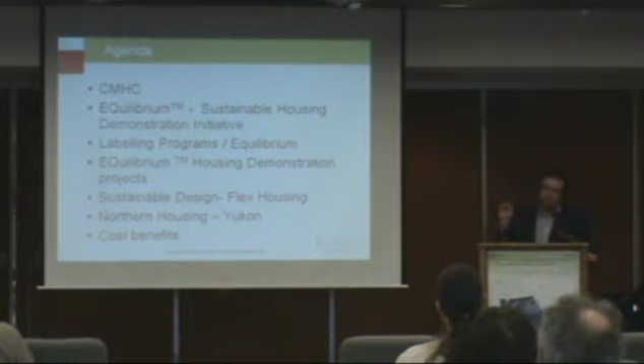One of the things, if I have time, is to also talk about flex housing, how it's incorporated within the design work. It's not so much to do with energy efficiency, but also affordability, adaptability, and accessibility, one of the most important ones. And if I have time, also to look at what they're doing in the north, because if they're doing something there, what can be applied down in the southern part of the country? We can get just as cold down here as it is up in the Yukon.

And just a little bit on the cost benefits. So I talked a little about the housing finance side earlier, mortgage loan insurance and some of the different products. CMHC also has an international division, which helps Canadian manufacturers export their product worldwide, and it's really been working very good. CMHC is also a world leader when it comes to the finance side and mortgage loan insurance.

So we also have our folks go to different countries to teach them how Canada gets our stuff done, how we house Canadians. And the information transfer, I quickly mentioned about that. We also have community development, so we have a representative in every province, because being a Federal Crown Corporation, we have to ensure we provide services and representation from CMHC at all levels of government.

So we have community development folks, we have Jackie Bevel, unfortunately she wasn't able to be here today. She's out of Regina, she looks after Saskatchewan for us. Then the other side is Aboriginal housing, where federal dollars are channeled through CMHC for building homes on First Nations. Of course it's not representative of all the housing, they do finance themselves, and there are other tools for financing housing on First Nations. However, through Section 95 of the National Housing Act, the dollars flow in through CMHC, and we help administer that.

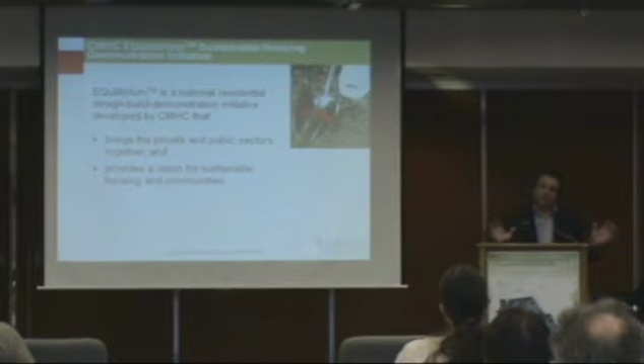Okay, so we'll get on with Equilibrium, the Sustainable Housing Demonstration Initiative. Where we're really at with this, it's a national residential design-build demonstration initiative developed by CMHC. It brings the private and public sectors together and provides a vision for sustainable housing and communities. I'll talk about the housing aspect this morning, and this afternoon I'll be on for about 15 minutes to focus on the next stage, equilibrium communities, and how the two integrate and how important that is.

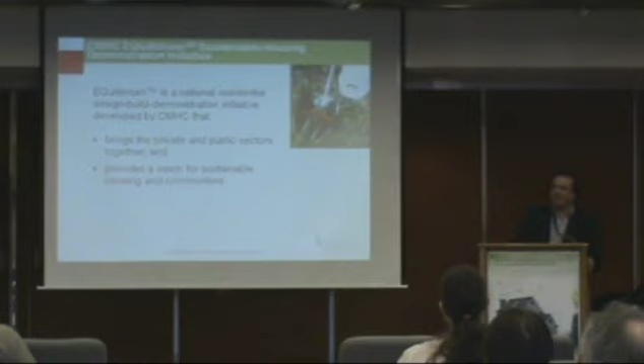And of course we'll have Philip Wong. I got him in from Toronto, and he's got a fantastic project to talk about later, one of the equilibrium projects too. Following me, we'll also have Trevor Gamlin, also from Avalon, who has one of the projects. I'll just touch on it a little bit too.

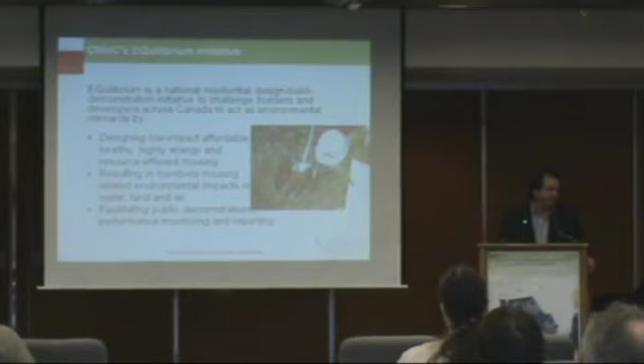So the idea here is designing low impact, affordable, healthy, highly energy and resource efficient housing, resulting in low to no housing related environmental impacts on water, land and air.

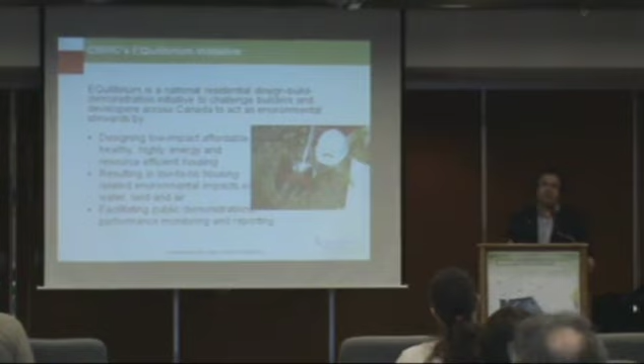Also facilitating public demonstrations, performance monitoring, and reporting. Once these units are complete, part of the agreement we have with each team is to allow us at least a 6-month window so we can do public and industry tours. People can come in and visit the homes and learn, see, feel, touch, smell, hopefully not kick, and they can see and learn. Even after they're sold and occupied, we can actually do some performance monitoring of these units and share that data and information with everyone.

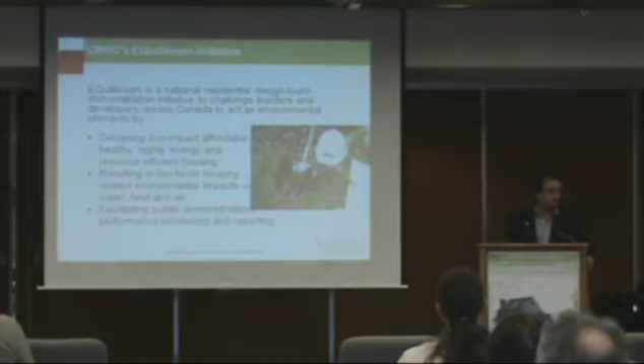There are 5 core principles we really looked at on this: occupant health and comfort, energy efficiency, which is one of the biggest targets, but also resource conservation, reducing the environmental impact it would take in construction and design of these units, and also affordability.

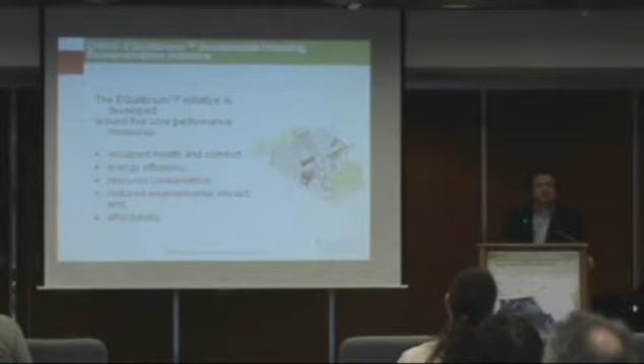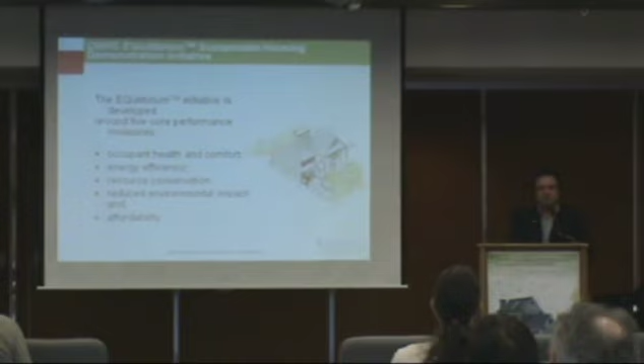Affordability is a real challenge because especially when making prototypes, it costs a bit more money to put these together. I know the challenge is to say, let's try to build market housing, but when you're putting pencil to paper to come up with designs, the first ones are definitely going to cost more money. But you'll learn from these, so you can sharpen your pencil as time goes on and actually reduce the cost. It'll become a lot more affordable for homeowners at that point.

As far as reporting is concerned, you can go online. At the very bottom here is CMHC's website, www.cmhc.ca. It's very easy - you choose français ou anglais first, then in the very center section it says sustainability or building and design. One of the two will bring you into Equilibrium, both housing and communities, and you can see the profiles of each of these projects.

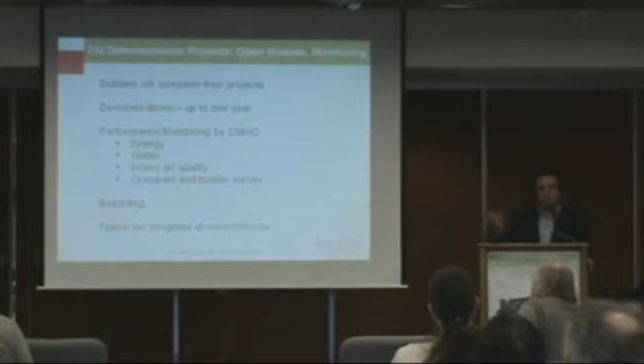You can look at the standard profiles, and then they can bring you down to some of the components. We also set up a little table over at the demonstration area with some of the profiles and features. Because we have Trevor out here, I wanted to ensure we had almost everything in print of some of the different features the Avalon Discovery 3 project has at this point in time, online.

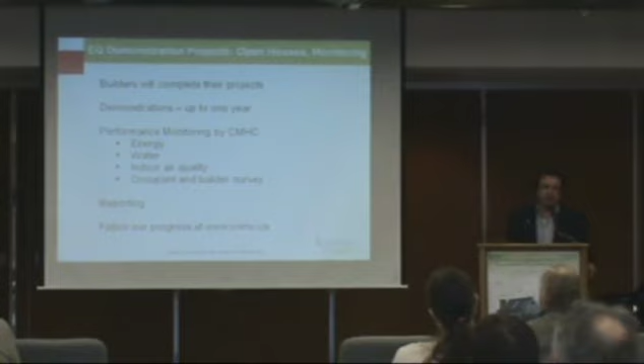So there could be more copies - I saved a few for tomorrow. In case it runs out, you can come see me and I'll get you some more. But regardless, this is all available online, you can download it and so on. I didn't want to kill too many trees - after all, this is sustainability, right?

So the research on highly insulated building envelopes looks at energy efficiency, also durability, because durability all falls part of affordability. If you're going to need to replace your house every 60, 70, or 80 years, is that really considered affordable? If you can build a house that lasts a lot longer, that basically goes to the bottom line toward affordability, stretching it over time.

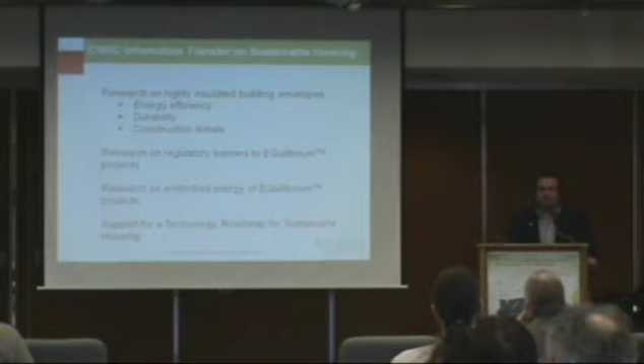And then, of course, looking at construction details. Different types of construction, whether it's double wall construction, structurally insulated panels, ICF, insulated concrete forms. There are many different types of concrete methods used. So we're able to dabble into a few different areas and learn the pros and cons of some of these different systems.

Local research also on embodied energy. What does it take to get the materials in? Where does it come in? Does it all come from a boat in a container to come all the way across? Is the material made in North America, shipped to China, manufactured into components, then shipped back over here, put into trucks to make it all the way down to Moose Jaw? Now we talk about embodied energy - how much does that actually cost by the time you finally get it here to the door?

And looking at some possibilities of using local materials, local manufacturing, local products, and looking at the cost benefits. Also, what does it do to the economy? It helps stimulate, and it creates more jobs. And also basically supports a technology roadmap for sustainable housing.

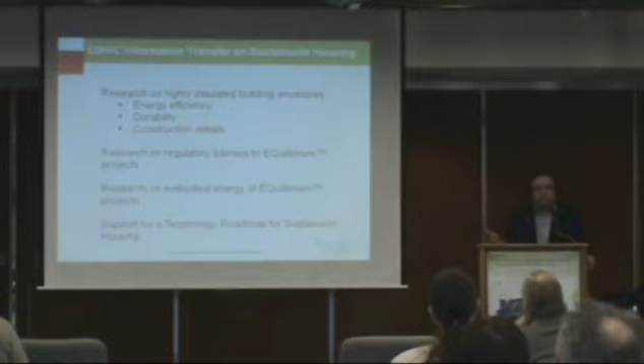So where is it going to go from here? Today, when we're looking at equilibrium housing, we want to get this started, but the thing is it all integrates into communities. And the thing is, if you can look at designing communities now, that'll actually - they could actually set, say, the parameter, or raise the bar.

To say, look, we want all the houses built in this community to be rated at no less than - I'll just take a figure - say no less than 85, the EnerGuide for Houses rating, for example. Then you've raised the bar higher than even, for example, the R2000 specification.

And the entire community can also save a lot of money on the fact that they don't necessarily have to put in so much infrastructure. If you look at how much it costs to put a stormwater management system in, when you can use bioswales, detentions, and retention ponds, and different landscape design to help reduce the actual infrastructure costs - what does that do? I mean, we know that 2x4s cost money, but really a lot of money too is the land and the infrastructure that goes into place. So if you can help reduce that, it contributes towards affordability, but also keeping it to natural environment.

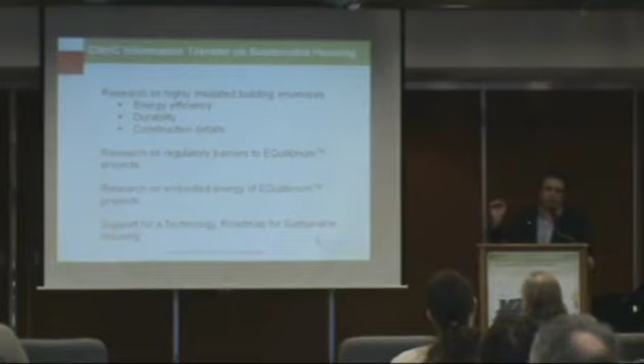And avoiding catastrophes. If you basically build in a lot of areas, say older areas where the old storm systems just can't keep up anymore because they've been added more towards drainage, where you get big downpours and the systems just won't handle it anymore, the cities might suffer flooded basements and so on. But if you kind of keep things natural, people will actually take advantage of capturing that water, using it within their own households, using it to water their lawns. It will substantially decrease the volumes being thrown down into the storm sewer systems.

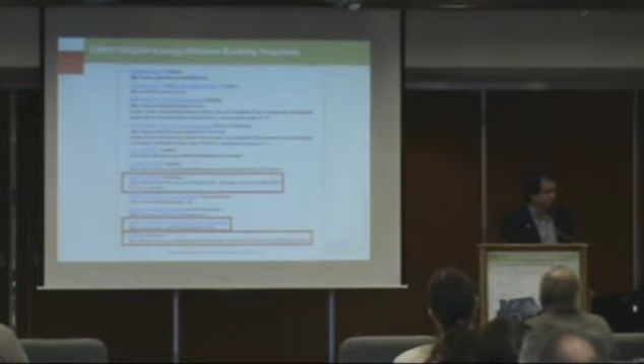Okay, I'll move over just a little bit to some of the different building programs that are out there. There's a lot of them. There's Built Green, which has been pushing its way over towards the west. We have, in the Yukon, a green home, the super green home - hopefully I can even talk about that. Power Smart in Manitoba, there's LEED. So there's many different rating and labeling systems. Or there's also R2000, I can't forget that, the one that we got listed on the very bottom there.

Equilibrium is not that, so I just want to clarify that. Equilibrium really is the name of this initiative and the name of this concept. So I, working for CMHC, could say, yeah, we can build an equilibrium home, but it's really not a certification. So if you build an equilibrium house, it's not like you're going to get an equilibrium sticker on the house or on the window.

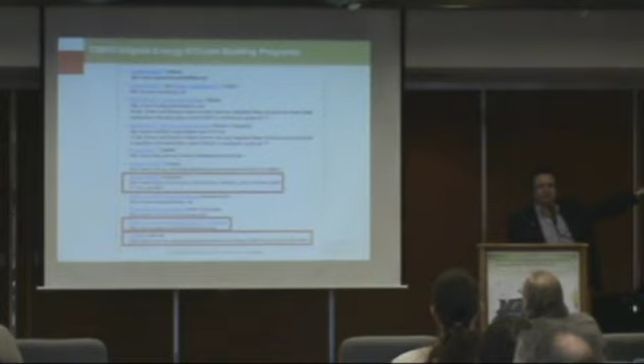It's, for instance, like Energy Star, another program that's more so in Ontario. When you buy appliances, there'll be an Energy Star sticker that'll determine or specify what type of power it'll consume and so on. Some of these other projects will recognize that. So that's about it for that one.

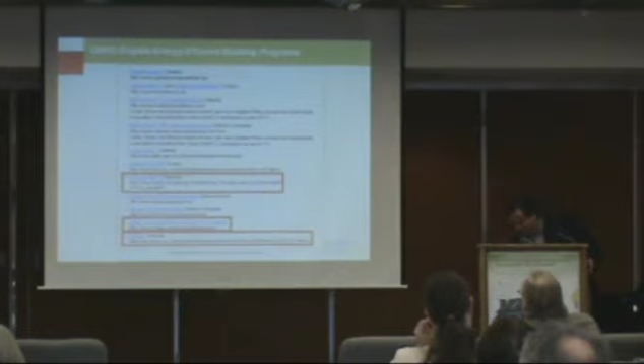So I'll get on to the actual equilibrium housing projects themselves. When we're looking at targeting the performance proposed by all the teams, we asked that they try to meet a net zero objective, close to that. So net zero, of course, producing as much energy as it consumes throughout the year.

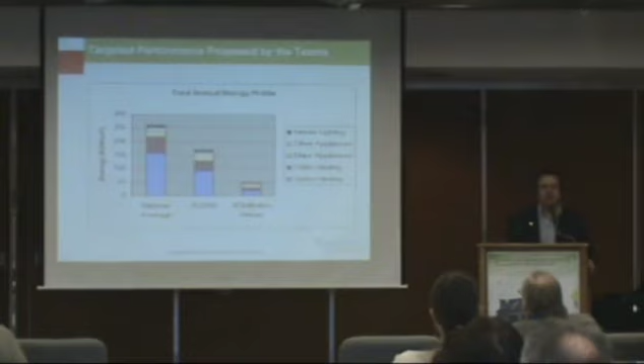So at certain times of the year, you're producing energy, say through photovoltaic panels, which is going into the grid, and other times you're consuming. Hopefully at the end of the year it shouldn't cost you anything. So that's one of the targets. There's a lot of work that goes into design and construction details to try to achieve those targets. It's not easy, but it's not impossible.

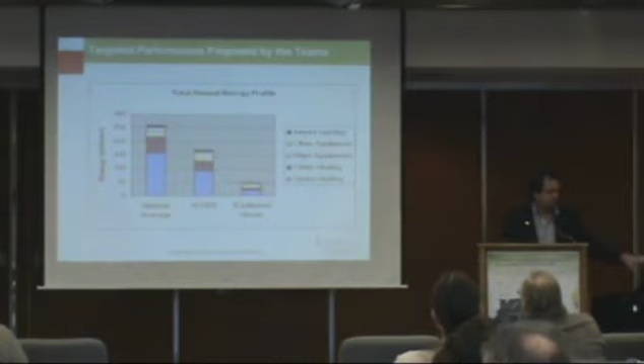For example, if you look at the national average on this chart, when you look at appliances, major appliances, water heating and space heating, you see on the blue the space heating it takes for the national average house. Now compare that to the R-2000 in the center column, and then the equilibrium house. You can tell right there, in kilowatt hours per square meter, how much energy an equilibrium house would actually use, which is actually very little.

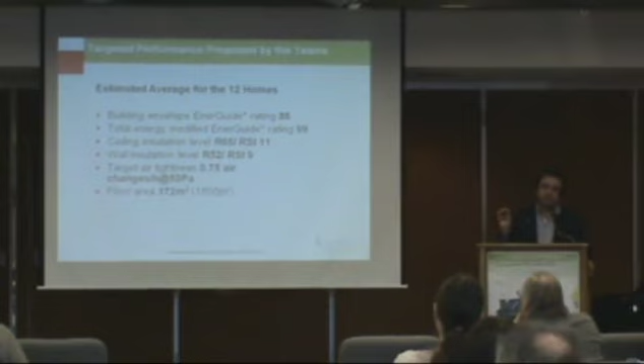So the estimated average for 12 homes: building envelope EnerGuide rating of roughly 86, total energy modified EnerGuide rating of 99. That's the energy side. You have to realize there's the actual building component, but also how much energy are you actually going to produce from the home. You add that to the actual building envelope rating, and you come up to figures like 99 on this one here.

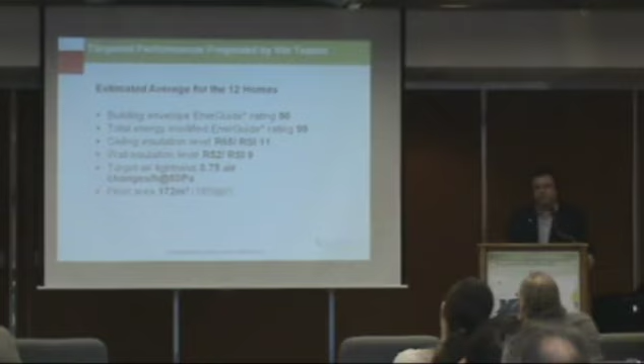And again, this is averaging for 12 homes. This data was actually collected a little while ago. When we set up the competition, we sent it out to everyone across the country, and we had over, I think, 75 or 77 applicants that came in. Out of those, we brought it all the way down to 12.

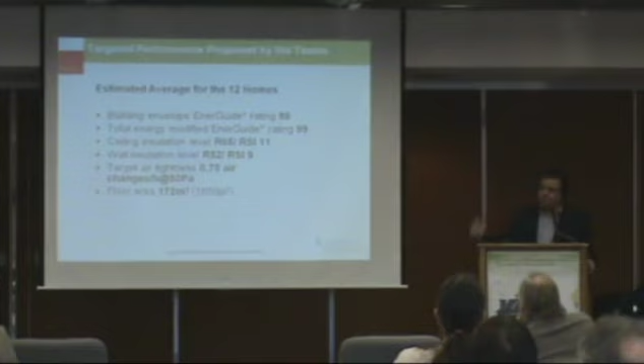That was great, but then after time came we realized, wait a minute, this is a demonstration project, and unfortunately British Columbia, the East Coast and the North really had none of them qualify. And it was pretty strict - when the door closed on that time, that was just the way it is. I think BC just slid their envelope under the door about one minute after 12 o'clock, but it had already closed.

So we realized, wait a minute, we really need to try to get some demonstration projects out there. So we opened it again, just for those areas. British Columbia got 2 and the East Coast got 1, and unfortunately the North didn't. However, we still have a good story to tell about the North, so it's not like they were omitted altogether. So now altogether we actually have 15 projects, but this data is based on the 12.

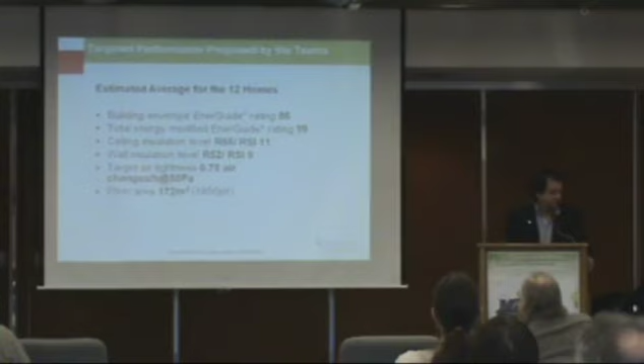So we're looking at ceiling insulation of R65, walls of R52, air tightness at least at 3/4 of an air change per hour, and also an average floor area of 172 square meters.

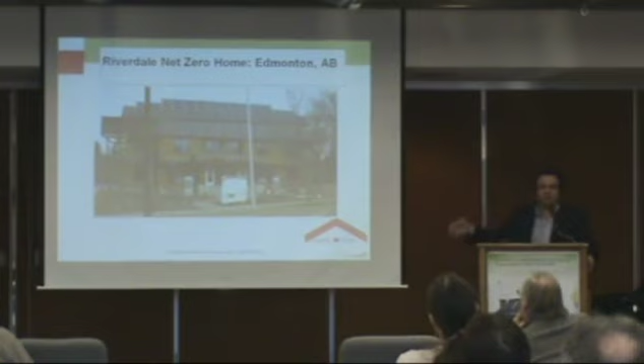One of the really cool challenges: if you look at the overhang for the doors, one has a little bit of a round to the front, and the other has a little peak to the front. Can anybody explain why? It's close - for them to get approval from the city to build a side-by-side in this Riverdale area, they wanted character. They wanted places that just don't look the same. So they were able to get their permit because of that.

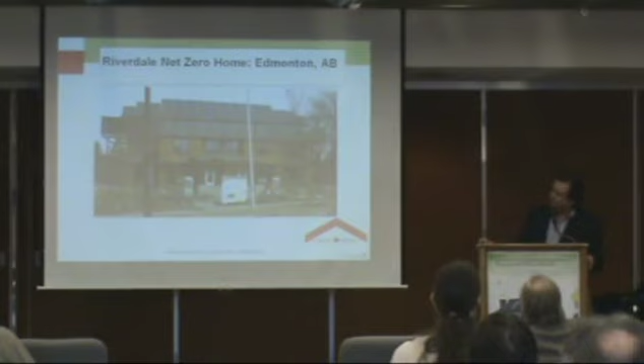So as you can tell here, what you see on the very top is an array of photovoltaics. Then you have hot water solar. And this is a project where they use double wall construction.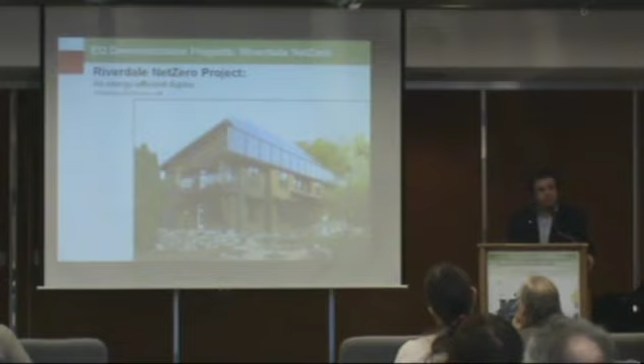Hot water - they have a 17,000 liter cistern in which they're storing the excess energy that the solar hot water panels are producing, because of course they don't need it all.

And I don't want to use the word overkill, but they know it. It was actually really cool to see them implement all of these different strategies and designs, but then they realized at the end, of course, they don't need all of this stuff.

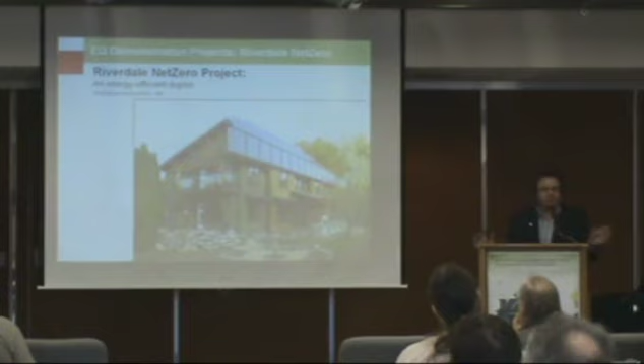I remember doing a tour in the middle of February, almost this time of year - I think it was 2 years ago, maybe 3 years ago. And anyway, the solar systems, the photovoltaics, none of that was still connected. It was installed, but they still had not connected it. All they had was a little 1,500 watt construction heater in the basement, and that was heating the house.

So you could pretty much almost heat this house with what they say is sort of equivalent to 4 toasters. That's how much energy you really only need.

So the question here, though, now that it's all built - and we say yeah, we're always learning as we go along - you ask yourself, is it worth spending thousands of dollars for all the stuff they put on the roof? How long would it take to recover your investment? Many, many years, and of course all the other gadgets that go along with it. So we learn as we go.

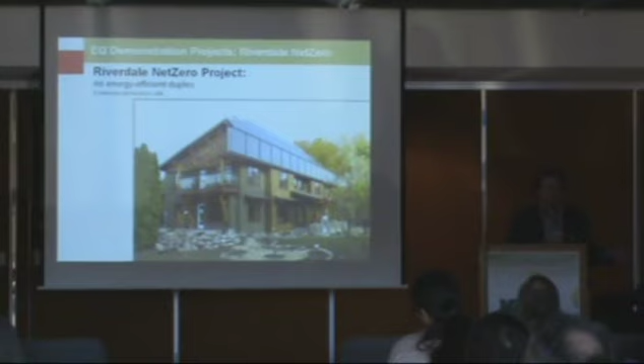But the really good story about this - they're also into their 4th generation of housing, where right now they're taking more advantage of passive solar energy, and I'll continue to say this: good building envelope, good airtight building envelope, is going to take care of a lot of your issues right now. And then it's going to be pretty difficult, when you can actually heat a house with very, very little energy, to justify why you need all these fancy systems.

Not to say that you can't - you can still get them net zero ready, rough them in, and then later on, depending upon how the cost of energy goes, you can add on easily.

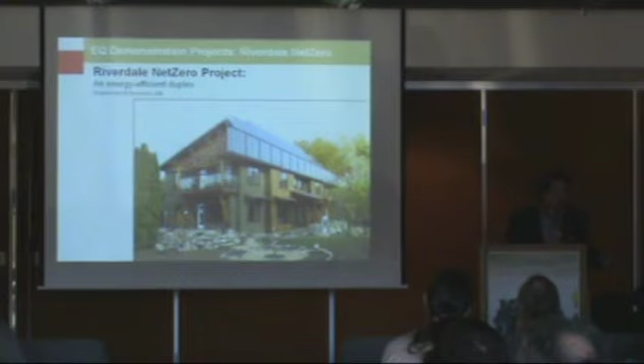Yeah, and this one here, you can also see - looking at accessibility, the way the walkways are going up, and the way they have the landscape design. They hardly have any grass at all. A lot of it is little gardens and different berries and types of vegetables that they're actually growing on site. And of course, they're using their own rainwater collection.

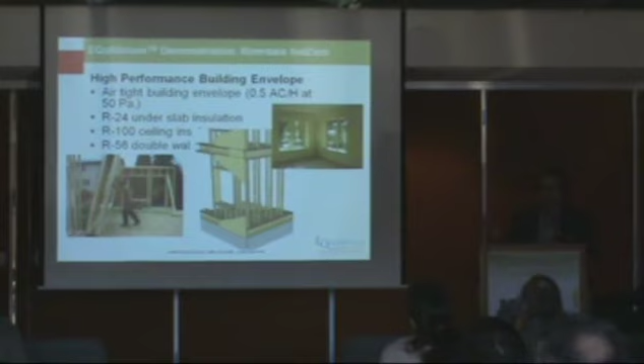Here's a double wall construction going up, and then of course you'll see - the one photo here at the very top, about the windows, about taking advantage of passive solar energy. On the inside, in the living room area, they actually had a concrete wall dividing the living room and dining area from the hallway in the back. So here again, now we have thermal storage in the wall.

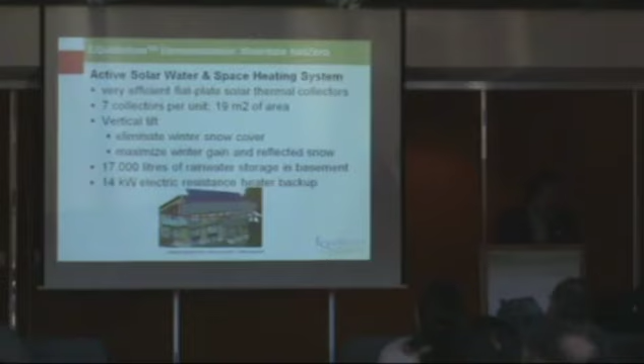To explain a little more, you have the active solar and water space heating system - very efficient flat plate solar thermal collectors, 7 collectors per unit. The vertical tilt eliminates winter snow cover, and also maximizes winter gain and reflected snow - so even reflecting off the snow, you have that extra energy bouncing off into the panels. I mentioned that 17,000 liter water storage in the basement, and there's also a 14 kilowatt electric resistance heater as a backup.

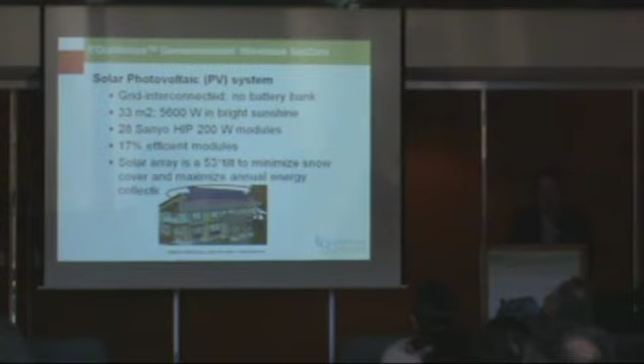So it's grid connected, so there's no battery bank. I don't think there's any project we did with Equilibrium that actually used battery banks, because in order to really achieve net zero effectively, you need to be connected to the grid - use the grid as your bank.

And they have some really neat features in this one. Of course, they got the hot water radiant in-floor heat in the basement. This one here is built with SIPs, or structurally insulated panels. They also did a structurally insulated panel foundation.

One of the lessons they kind of learned in that one is that the engineer designing the foundation for the SIP manufacturer had approved the design, and I suspect there were some potential conflicts between the engineers. The builder engineer had recommended that they add on some lateral bracing, because I guess there was fear that maybe it wouldn't hold. So there was a little bit of a controversy going on there.

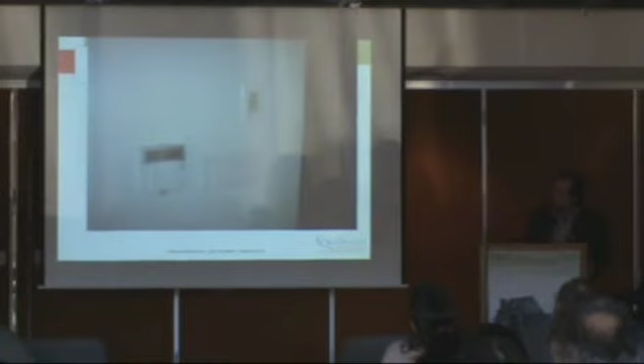One of the really neat features they put in here, you see on the very top, that's a light switch. What color is that? Same color as this forum. This is a green switch. With the green switch, what it basically does, you'll see plugs, and of course we've all learned about phantom power.

You've got all your computers, your phone chargers, everything plugged into the walls all day long. And even if you plug your cell phone into the wall and then disconnect it from your phone every day, those little transformers are still sucking a little bit of juice. Even your TVs, with instant-on.

Some of you might be a little older and remember the old tube TVs, where you'd turn them on and it would take about a minute or two before they finally slowly fired up. Well, they came up with instant-on. Isn't that fantastic? You push it on and poof, your TV's on almost right away. That was a miraculous idea.

But the thing is, the transistors, everything inside that TV, are always actually glowing—always on, but at a very low level, always sucking power. So what this switch really does is, as you walk out, you turn that switch off and all that stuff shuts down. You save at least $250 a year in energy just by turning that off on your way out the door.

So they have one in the entrance, and they actually have one in the master bedroom in case you've finally crashed and you're ready to go to bed and realize, 'oh dear, did I turn that off?' No, you just hit the switch and you're done. It's a really neat feature to have in the home.

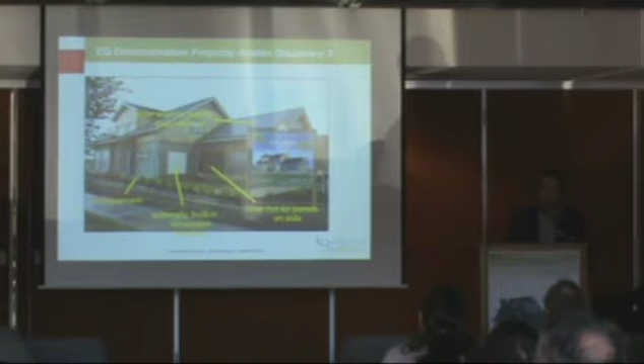I'll quickly mention a few things about the solar electric panels that are actually built right into the roof—you can't even tell. You don't see panels, it's built right into the roof. You see those shingles? See a little bit of a shinier area? Well, that's them. There are also solar hot water panels. It has no basement, it's slab on grade, and Trevor I'm sure is going to talk about that. Those are just some of the features and advantages of doing so.

And also automatic built-in retractable shades. There's a lot more to that one, but I'll save it for Trevor.

This is the Urban Ecology Project, built in Winnipeg. It's the only project in the Equilibrium initiative done by a non-profit group, and it was a huge challenge. The city actually gave them the land for $1, to continue on for affordable housing for some of the Winnipeg folks. This is side-by-side.

On one side, they built it to regular R2000 spec, with WHRC—Winnipeg Housing Rehabilitation Corp—who have set their bar so that anything they build will be R2000 minimum, with the exception of this one, which is above that, so the bar was raised substantially higher. So one side is R2000, the other side is built more toward equilibrium, trying to achieve net zero.

You can barely see them, but on the roof you'll see the photovoltaics and also solar hot water. The solar hot water is there to heat the hydronic in-floor heat in the basement, and also domestic hot water. The photovoltaics are there mostly to run the pumps, just the small pump to circulate the water, and to produce enough energy that hopefully they can feed some back into the grid to offset some of the energy costs.

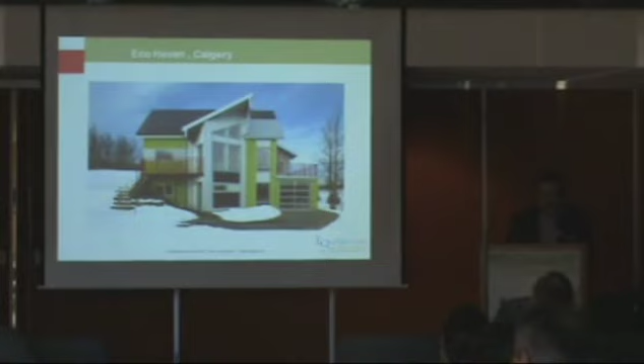Everyone moving into that subdivision needs to meet those specific standards. They were really hoping that while this was being built, there'd be about 20 or 25 more of these built. It's just a little slow going, but it's coming along. And they did a beautiful job with this project.

This is the Ecoterra, actually out in Eastman, Quebec, about an hour south of Montreal. It's a really cool project, I remember visiting this one. And how many would believe that this is actually a modular house? It's actually prefabbed in 5 different sections and moved to the site.

The photovoltaic system also has thermal recovery. The sheets of photovoltaic film are integrated into the metal roofing, so you can't really even see it. Hot air from behind the panels is drawn into the interior distribution system.

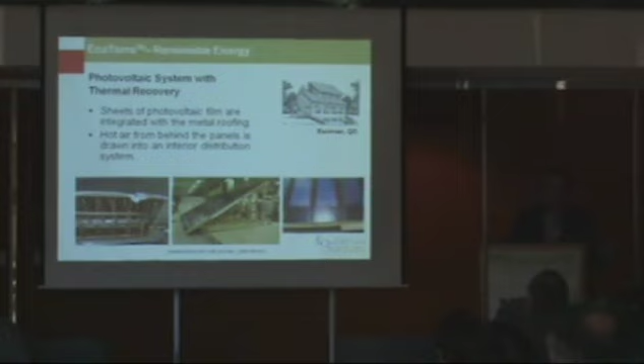So if you look at this setup, this one over here is actually pre-manufactured, and it takes advantage of the hot air produced from behind the entire system. They're actually drawing it and bringing it down into hot air tubes to heat the floor in the basement.

They also built a thermal wall, I'll show you that in a second. So this whole thing is actually designed all in one unit, as you see here, and it's brought on site.

Along with other manufactured homes that they produce out of the plant, they've really done a lot of studies towards this whole concept and idea. So they're really hoping that they can actually manufacture these.

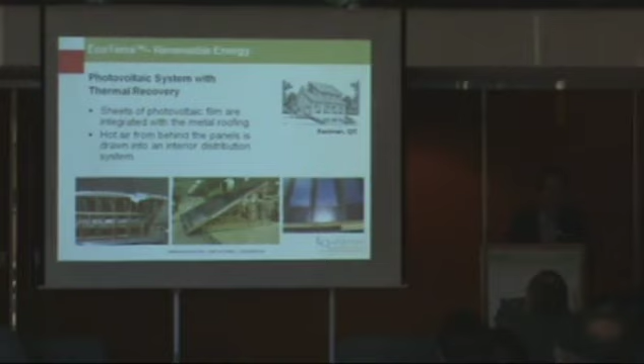So anyone wanting to build their own house can build whatever they want. But if they want to buy the roof system with all of the integrated portions or systems built into it, they can just buy the roof from them and ship it right to site. Rather than just buying trusses, it all comes together - you get a crane, pick it all up, and pop it on site.

This is them manufacturing that on site. It has R54 in the ceilings, R37 in the walls, R22 in the basement, and R7 underneath the slab. Other projects have a lot more than R7 - they could go a little bit more than that.

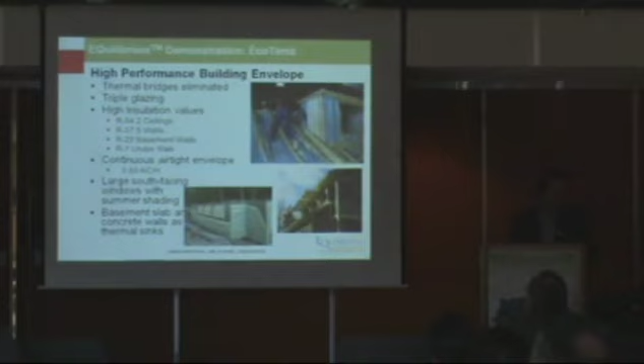You can see it has retractable shades. I remember when I was there, it was set up perfectly because it was just the afternoon, and with the overhang, the shade went right to the very bottom of the living room windows, in the areas that are south facing. So there's no air conditioning required, because they're taking special attention to the design features to ensure it's properly shaded, reducing the heat and passive solar getting into the walls or into the home.

But you can see here, this is on the inside - you can even see the sun beating down on the floor. In the very middle area here, this section is actually a thermal wall, so even some of the heat from down below hitting onto that will capture the energy.

They also have an in-house energy storage monitoring system. On my display table, I actually have some information sheets on that system.

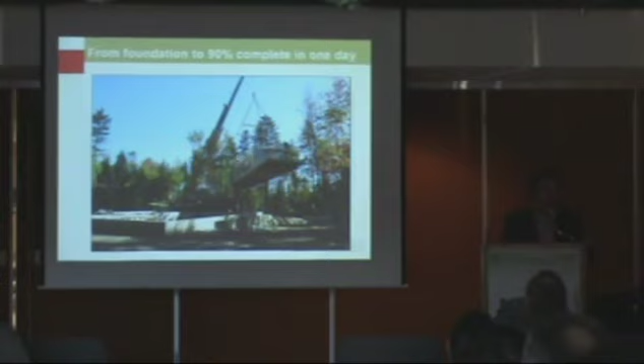It's pretty slick. This is the site - they built the foundation there, and then they brought in unit by unit. What was really neat about this one is all the mechanical was actually built in one module, so all of your electrical panels, HRV, air exchange systems, water systems - everything was all into that unit. So they just basically popped it into the foundation. Once the house was all built, they just connected, plugged everything right in, and away they went.

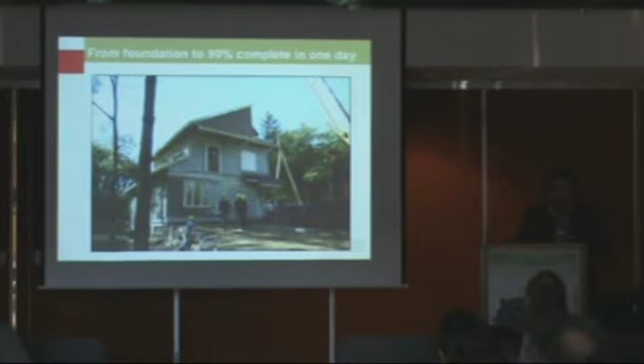See, that was pretty quick - in about five seconds the house was built. Yeah, so it's just a matter of a couple of days, and it was all put together and done. Actually, I think we pretty much did it in the same day.

All right, so this one here is the Now House. It's a really interesting one. This is the only existing unit of the Equilibrium projects, and it was built in Toronto. What was really neat is that, well, it's now probably 60 to 65 years old - this is a wartime house.

What's really kind of cool about this is it just happened this way. Canada Mortgage and Housing, back when it was called Central Mortgage and Housing, first started in 1946. The reason it was created was simply to help house the veterans coming back from the Second World War. They needed housing, places to stay, and they needed to raise their families. So Central Mortgage and Housing hired engineers, architects, and designers - people who could actually build and design these houses.

And we were heavily involved in constructing these, and a lot of these ended up, of course - you see a lot of them houses. Who hasn't seen any of these out there? There are thousands and thousands of these across the country.

And so it was actually kind of neat to see that this ended up being one of the projects, because we were actually the ones who designed these to begin with, and now here we are 60 years later looking at retrofitting these units.

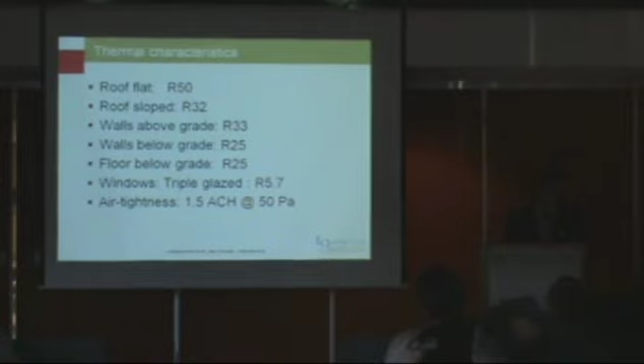The way it is right now is that on the flat roof area, since this is a story and a half, they got R50. On the sloped area they achieved R32. They got R33 on the walls above grade, and below grade R25. Then they installed triple glazed windows, and achieved 1.5 air exchanges per hour.

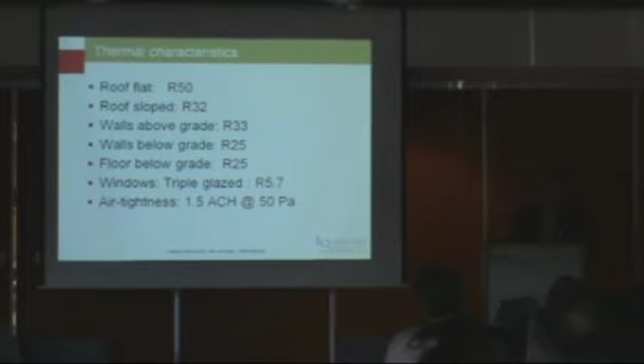It's really difficult in an existing unit because you're working on the outside, and they kept the inside alone, which saves a lot of money that way. But on the interior, when they installed the systems, they found the slab wasn't in very good condition, so they ended up jackhammering it. That allowed them to insulate the floor at the same time, and then they put in the in-floor heat.

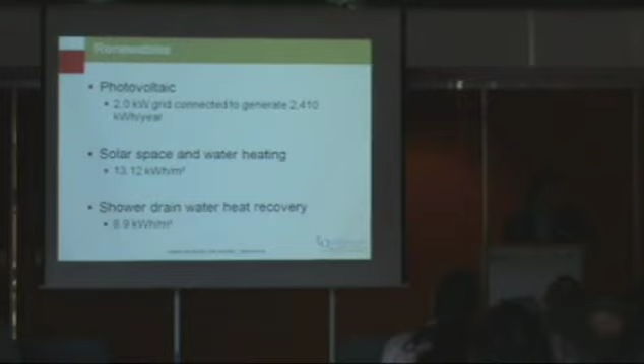So they installed a photovoltaic system, they also use solar for space and water heating, and they have a heat recovery drain in the home. Those are great when you have a two-story house or a full basement, but unfortunately if you've just got one level on a slab on grade, you don't have the depth to use those systems. But they work quite well.

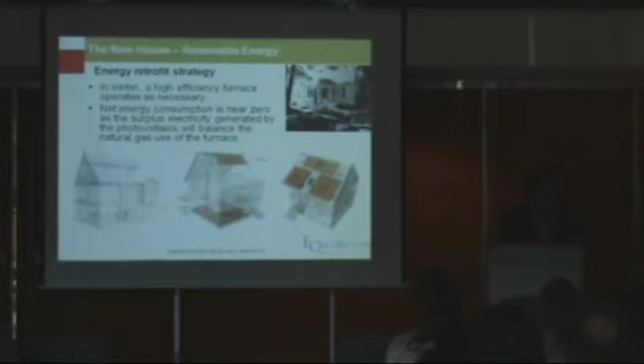The idea is that in the winter, the high efficiency furnace operates only as necessary. So if you're not getting enough energy from the sun and hot water, the furnace is only there to kick in as a backup, but it is a high efficiency furnace. So the net energy consumption is near zero, as surplus electricity generated by the photovoltaics balances the natural gas use of the furnace.

Using the existing structure reduces the need for new materials and land. So that contributes hugely to resource efficiency. The materials still in good condition can be reused, and energy upgrades to existing homes can reduce the overall embodied energy of a home.

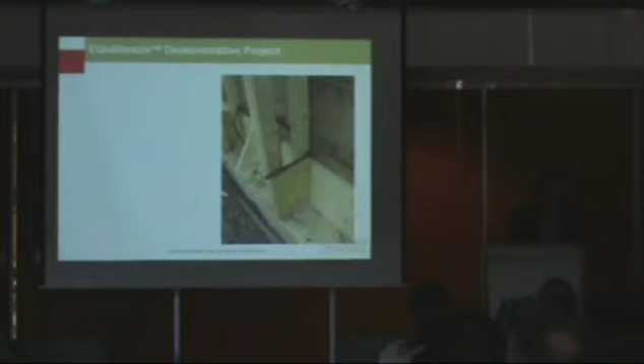So this is just a couple of photos when they had dug around. They insulated, they waterproofed, then they insulated on the outside. This is another photo of the exterior retrofit being installed. If you look at the bottom of this photo, you can see it had been insulated.

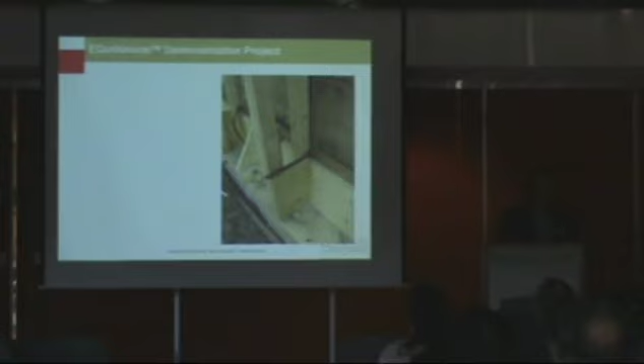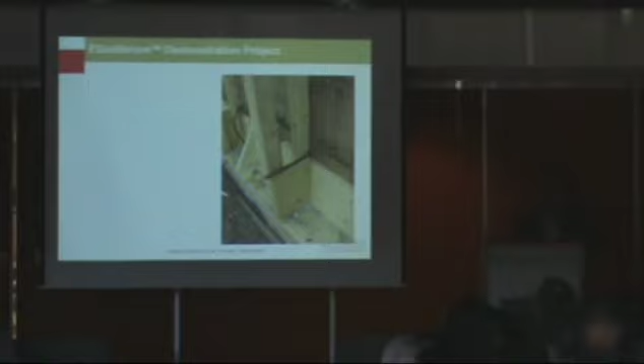Because of the thickness, they were able to take advantage of building an additional space frame, double wall type of exterior to the home, where the system is put directly over top where it meets the exterior insulation. There's not a lot of thermal break there, just a very little break out of the plywood, but with the space between the studs, it actually allows for a thermal break - that was the thickness of the insulation, plus the thickness of the wall.

Now they blow in foam insulation, so it acts as a vapor barrier, it acts as an insulator, and also acts as an air seal at the same time. So it really minimizes the amount of air leakage that'll occur.

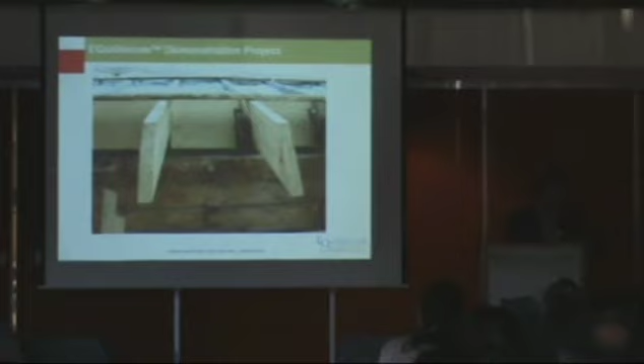And then they also strapped right over top of the roof, so they put some rafters over the existing deck, and then they insulated that as well. So now the entire envelope has been completely done, from underneath the slab all the way around. And at the same time, they put a new kitchen in for the fella.

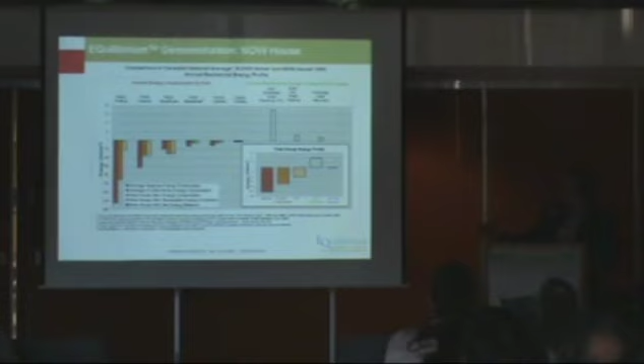So when we're looking at the actual annual energy profile on this, we look at the energy used, comparing national energy consumption on average, what the average R2000 is, and what the Now House is when it comes down to energy consumption. Starting at the very far left, that's what you'll see for space heating for the national average home - that's the dark colored one. And this is space heating for the Now House. Then as we go along, we get water heating and appliances, and then space cooling.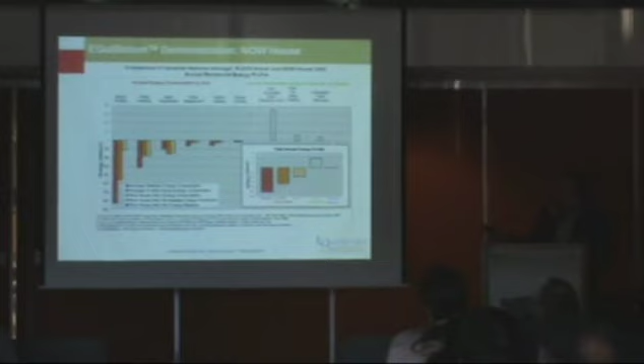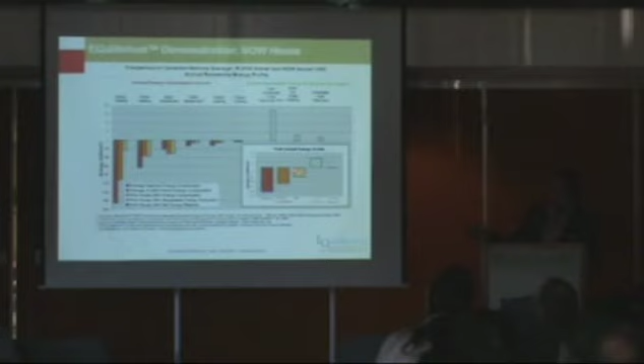So that's energy consumption. But now if you look on this side of the line, this is the annual renewable energy - the grid-connected solar photovoltaics producing this. And then we also have hot water solar, and the gray water heat recovery I mentioned earlier. So if you look at this little box here - national total energy profile, the R2000, and the Now House - the only one of them all that has renewable energy is the Now House. It's producing this, and in the end it comes out to almost a flat line. That sweet spot, the flat line, is what everybody really wants to achieve. If you get it over top of that, even better, because then you've got net zero plus.

So this is what it looks like on the south side, of course - photovoltaics and hot water - and what it looks like in the front.

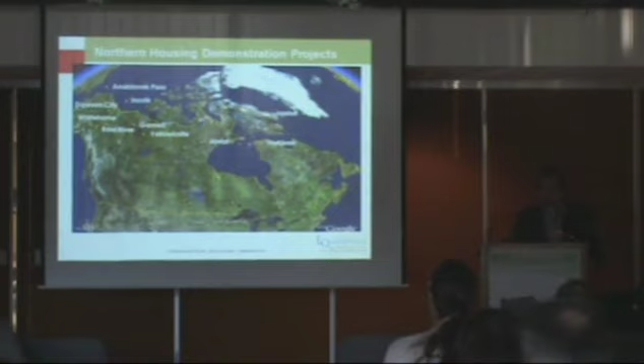I mentioned earlier if I had time I'd talk a bit about what's going on in the north. Now they weren't able to get any equilibrium projects built in the north. However, our researchers have been working closely with a lot of the communities up there to come up with solutions to their problems - healthy housing, indoor air quality issues, asthma, people being sick in unhealthy houses, and also super cold, energy-hungry homes - and the cost of fuel for heating up there is extremely expensive.

So they have to come up with some other answers - if they're going to build new construction, what do they need to do? Yukon Housing, especially taking advantage of visiting some of the equilibrium projects and having fantastic staff - one of the things that really helps is being able to quickly adapt to some of these new concepts without too much resistance from government and locals. They've decided this will be the design they incorporate, raising the bar to this standard - they call it their super green home. I think honestly they're probably one of the most advanced in the country, I have to admit.

And in that area, most homes are heated with oil, so they need a different answer to their problems, because people are spending sometimes $1,500 to $2,000 a month in the cold winter times, and they just can't afford it. When you look at housing affordability, that is atrocious.

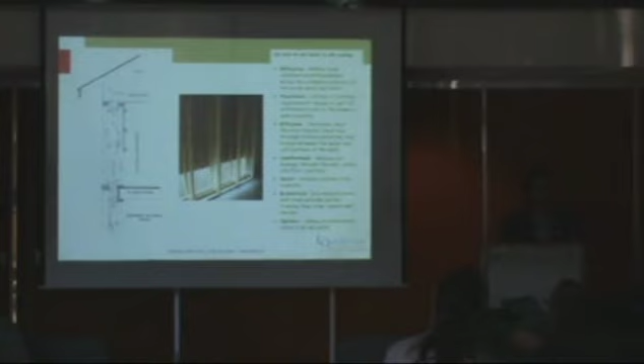This is a pressure-treated foundation in this one, on a crawl space. This could be done either in a basement or a crawl space design, depending on how far down you want to go. But what happens is the floor joist sits on top of the interior partition, and this allows your insulation to continue all the way through. So you have a nice complete blanket, because this is a really bad area for air leakage - that whole area where your floor joist goes all the way through to the outside. If you can button that up, there's no option for any air leakage in that area, and they blow in cellulose insulation right from the bottom all the way up.

And so it's basically, it works really well. It's a balloon style cellulose insulated blanket that wraps completely around the exterior, the inside walls and the floors. But not cellulose in the floors, of course.

So it's really comfortable. It reduces the air leakage through the wall, the ceiling, also in the floor junctions. It's really quiet. It reduces outside noise transfer.

It's very economical, so pre-manufactured wall studs provide quicker framing than the other double wall designs. The floor systems and the above ground systems are all pre-manufactured, so it goes really quickly, and it works well.

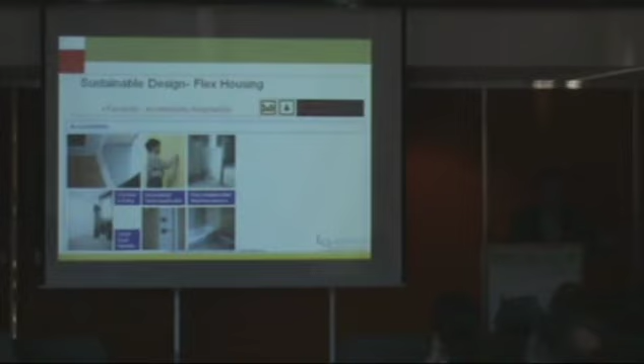Also in the walls, before you drywall, it's easy enough to put in some plywood backing or just knock in some 2x4 backing, where you'll eventually need good reinforcing for grab bars and so on. Planning and putting this in right at the time really doesn't cost hardly any money.

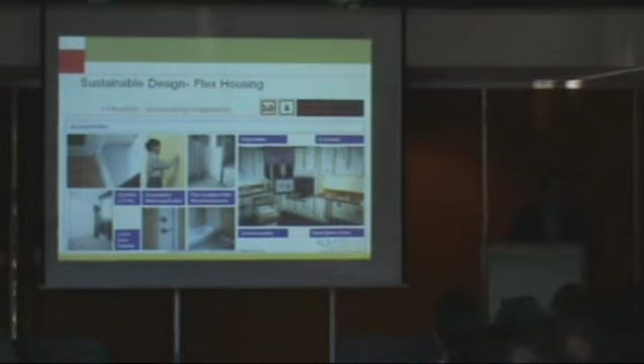But if you need later on down the road to rip open the walls to put in your backing for reinforcing grab bars, that's going to cost a lot more money. So if you think ahead and put these in, it really doesn't add a lot of cost. This is just an example of a kitchen, where you'll see the stove area.

It's hollow underneath there. We're not trying to say the house should be designed to look like a hospital, but in this case they could actually design it so there are doors that go underneath the stove area, so you don't need to have an entire box.

The countertop goes right over the top of that whole area, so you can open those doors and slide a wheelchair underneath there.

But it's a lot easier to keep clean, because usually what's underneath a kitchen sink or stove area, you mostly keep your garbage in there—you keep all your cleaning chemicals and other stinky stuff in there.

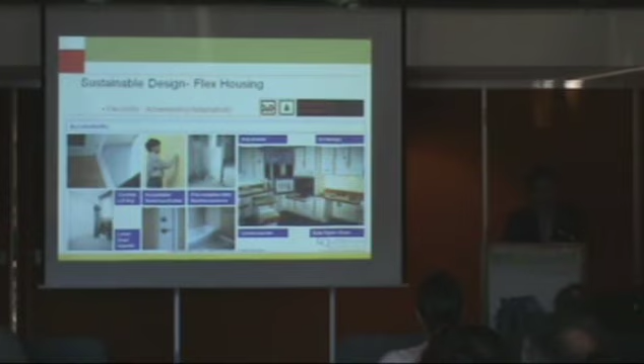If you look at the oven, it's not that easy to find, but I think it's a smart idea—look at the way the door opens. Imagine yourself in a wheelchair with a conventional oven having to reach over. It's already tough enough as an able-bodied person, but to reach over top of a hot oven door is harder.

This way, they pull out the little shelf, pull out your roast, open it up, put it on that shelf, baste your roast, put it back in—safe and easy.

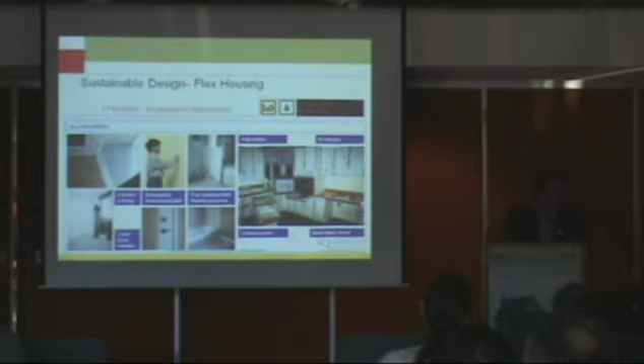So you're going to see some of these different features. There's tons of other features, and you can get more information on our website. I'm just touching on a few things, but we're looking at adaptability as well.

In this case, you'll see you have a washer and dryer in your main washroom or mudroom area. However, later on, if you want to convert that to a roll-in shower, you can relocate the washer and dryer easy enough. This already has it built into the floor drain, and you already have hot and cold water running into there, and your drain is in the floor, so you can set this up as a roll-in shower easily.

What does it cost? Otherwise, if you didn't do this, you'd be into the thousands of dollars to modify your home later on down the road. But here again, it's easy.

You're looking at a room space. Right now, for instance, in this photo you see a little office space, and you also have a bedroom. I'll show you this other one—this could be the other way. You can have this big office space, and go the other way.

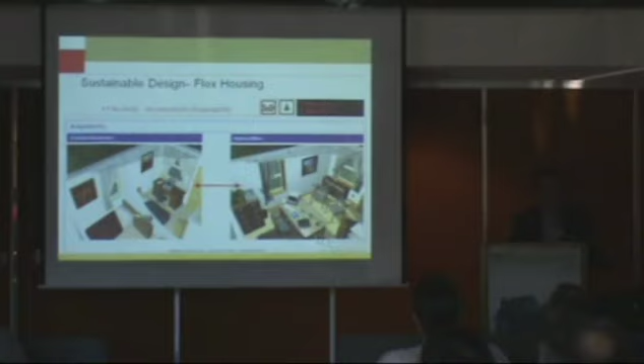They say, well, if you had an extra child and need another bedroom, the way you've already pre-designed it, of course by code you need a means of egress, so you have your window placements and plug placements and everything else. In this case, if you want to split this up into two rooms, all you have to do is put in a frame in between and drywall it. You've already met your means of egress, you've already met your power, and in one area before you drywall it, you've already roughed in a rough opening for a door.

So now all you have to do is take your keyhole saw, cut out the hole for your drywall, and you already have your rough opening—pop in your door, and Bob's your uncle.

You got your room, and that's it. And so if you think about these things and incorporate that in your floor plans, away you go.

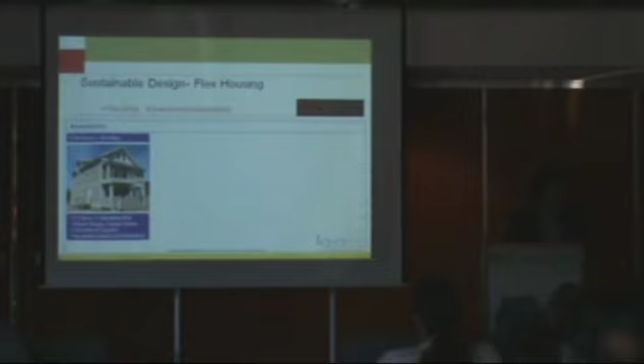We're looking at a few different types of flex houses that were built, and there's no limit. By adding granny suites and so on, of course you got to ensure that everything complies to the zoning bylaws.

But we're looking at even apartments, like this is UniverCity Flex condos in Burnaby, BC. They took 2 units into one. They made different types of units.

This one here is sort of in Edmonton. It's a flex condo, so 2 units in one. But what they've done is they share the space of living and kitchen.

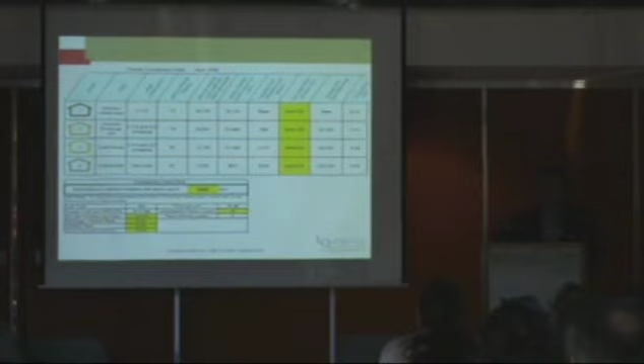So if you basically average this thing out, when you look at your principal and interest and your mortgage, on that yellow column, you'll see from $240,000 at the top down to $264,000. So your principal and interest on that loan, I think I have it on the next slide here, sorry.

There we go. In this column, you'll see the principal and interest is from $1,333. It goes up to $1,466. And you say, well wait a minute now, that's not any cheaper, that's more money.

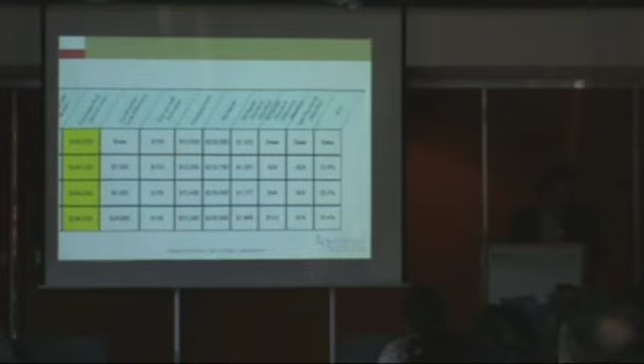However, if you basically look at what the net payments are after you've actually calculated your energy, it's actually $74 less to live in a super green home than it is in a conventional home. So it makes financial sense.

You can do it. And the thing is they did not necessarily go with all kinds of photovoltaics and solar hot water. They didn't add all that. What they really concentrated on is a really good, super tight building envelope, and also taking advantage of passive solar energy. That's basically keeping it simple. And it's solar ready if they need to.

So that's pretty much it for my presentation. I think I got about 2 minutes here if I have any questions. And I already have an arm out there.

Yes? I'm glad you ended up with a cost comparison question, because that's what I wanted to raise. Great presentation. The Now House, we probably got at least 100, maybe closer to 200 wartime houses. And so the cost comparison in terms of per square foot, because it's a smaller house, between that house and the demonstration houses that we built, what's the construction cost comparison, retrofit versus starting?

It's a good question, and I don't have the actual figures, but I think by the time they were done with the retrofit of the house, it came in closer to around $80,000 or $85,000. Now it sounds like a fair chunk of change, just considering it's retrofitting an existing house, but this house will now last many more years, probably longer than the 60 years it's already lived, and it'll go on, and you look at the long-term operational costs.